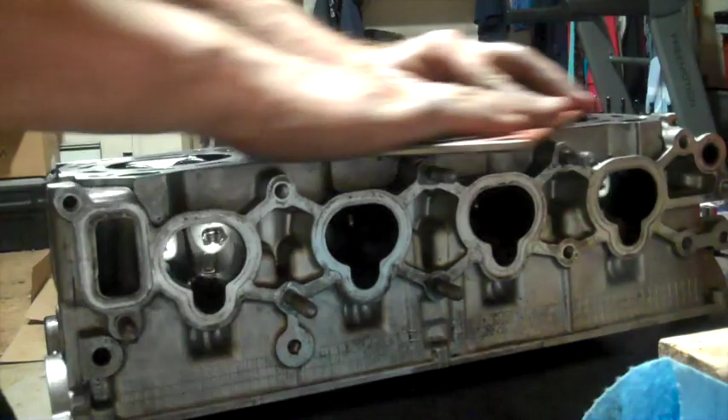Using a steel block and some 220 sandpaper, I'm checking before doing more cleaning work to make sure I have a flat surface here, using my .002 gauge. Yeah, right in here there's a little bit of a low spot, not very much though. I'll do a little more sanding on it, but I think it's pretty good. Got a pretty nice flat surface.

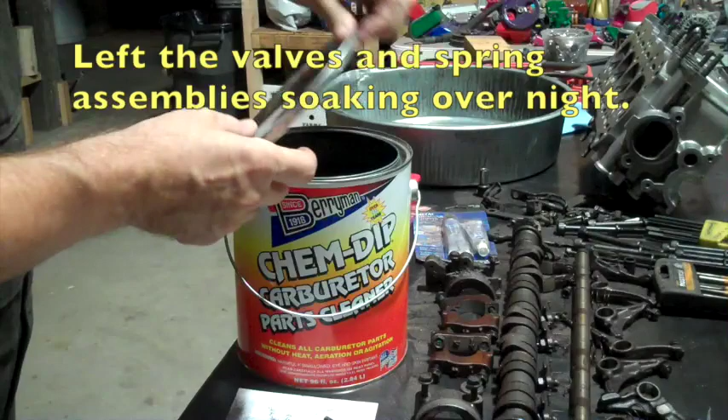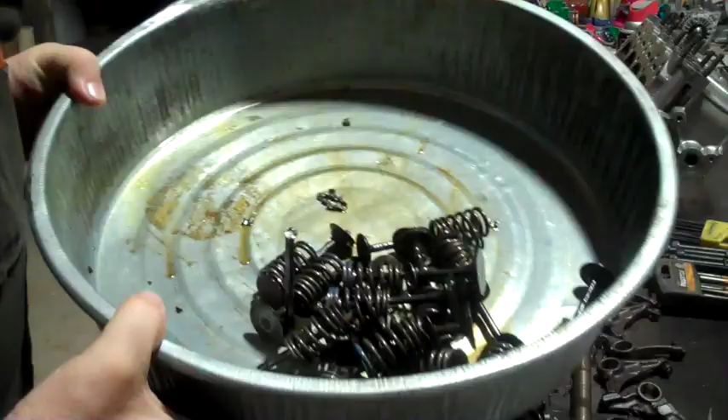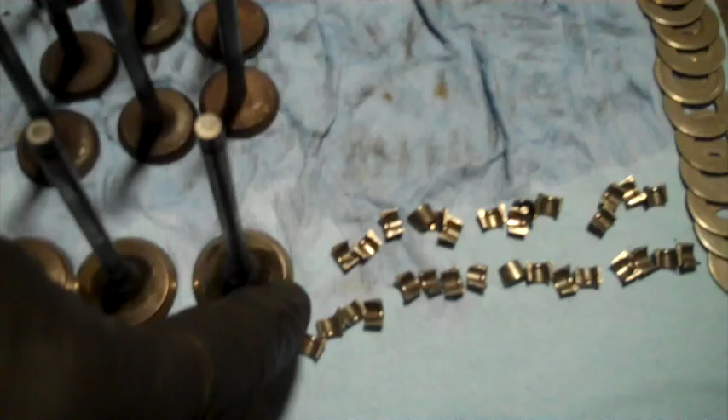Okay, I bought this Chem-Dip to clean off some of the parts. Let's see how that works. Looks like it worked pretty good actually. Everything looks pretty good and clean, especially did a really good job cleaning the springs and the washers and stuff. The valves are not so great though, I'm gonna have to work on them some more. I've got especially these exhaust valves, and I'm missing 2 keepers, probably in the bottom of that can.

Uh-oh. Okay, I've been cleaning on this thing for too many hours to count. I just polished off my head surface with 1200 grit sandpaper. It looks good, I checked it.

Got it all cleaned up pretty good, used my little wire brush. The worst was trying to clean out these little exhaust ports, they were really hard to clean out. I started cleaning up my valves, and they're pretty corroded. I don't like the way they look, so I just went ahead and ordered a new set of valves, and when they get in, I'll seat those new valves.

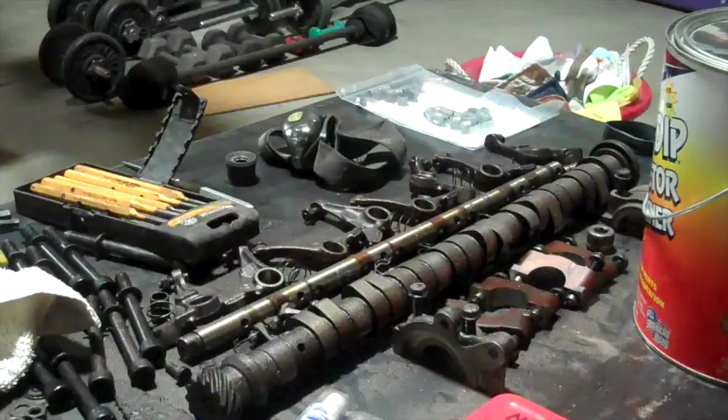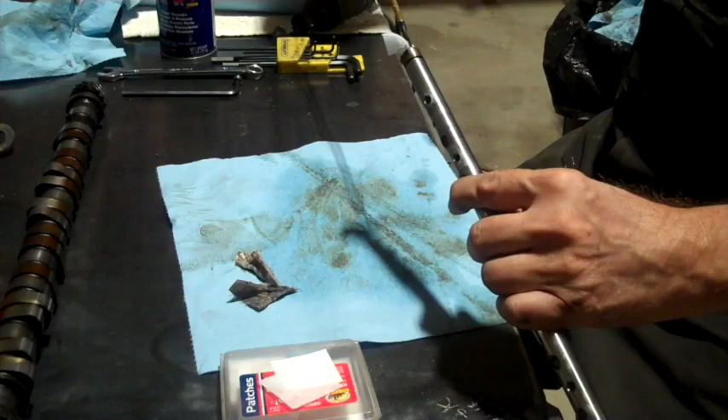In the meantime, I have a lot of other parts, little things that need to be cleaned up. This rocker arm shaft has a little plug in the end. It comes out with a number 5 hex wrench. You have to hold on to the edge here at the same time with a number 13. I figured out that my 22 caliber rifle cleaning kit works really good to clean this out.

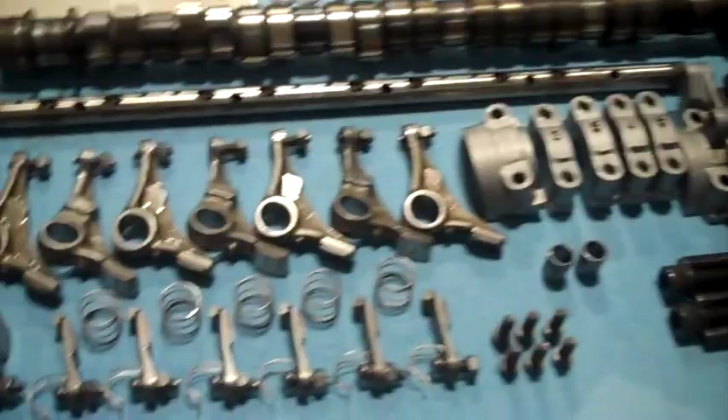So I thought I'd share that and it might give you an idea. Alright, that's all cleaned up. All the inside parts are all cleaned up and organized. The little parts weren't that bad. I numbered all of my rocker arms with my etching tool and left them in that Chem-Dip overnight, and then the next day they were pretty easy to clean up.

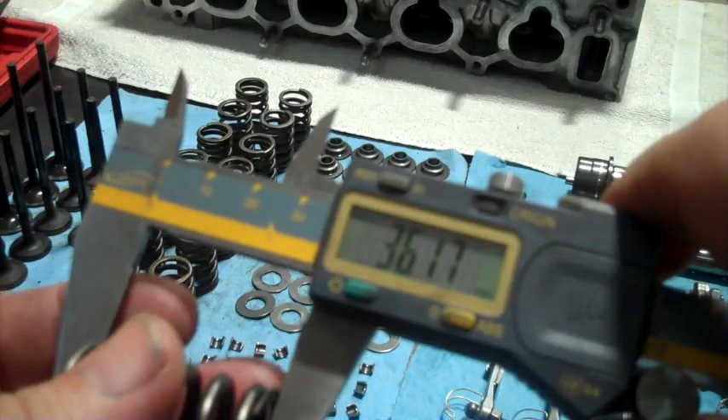Alright, we need to inspect a few things, and just looking at stuff, it all looks pretty good. I want to measure these springs, just using my calipers here. It looks like about 36.1, 36.4, 36.7, 36.4. So pretty much all around 36 point something.

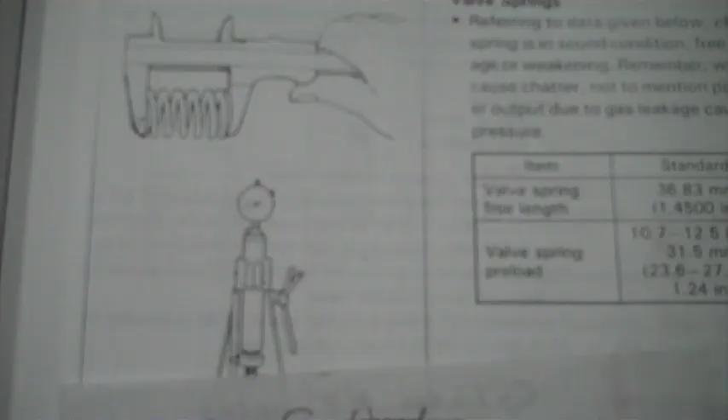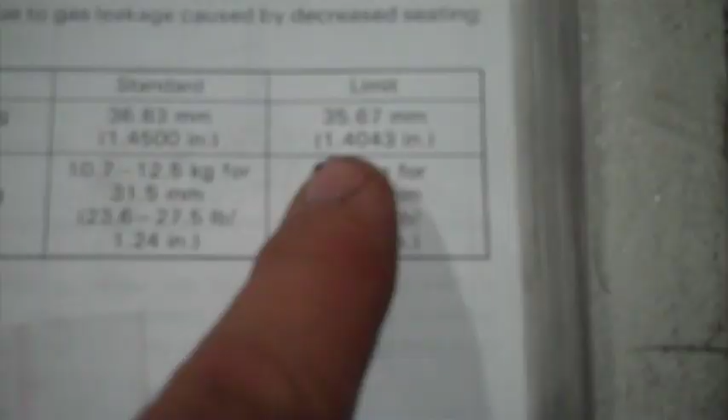In the book it says that should be 36.83 and no less than 35.67. So I checked all of the valves, all the valve springs, and they're all the same, between 36.4 and 36.8. So they're good.

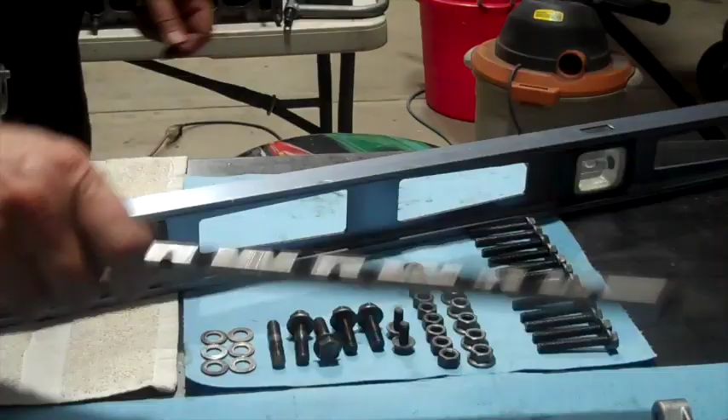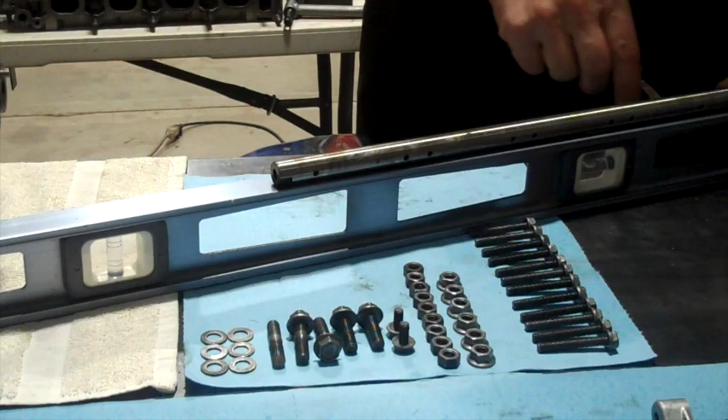I want to make sure my rocker arm shaft is nice and straight, so I'm going to lay it on this level I have here, that's probably the straightest thing I have. And I'm just using my .002 inch feeler gauge to check under, making sure there's no gaps. It feels perfectly straight to me. Yeah, it's good, it's straight.

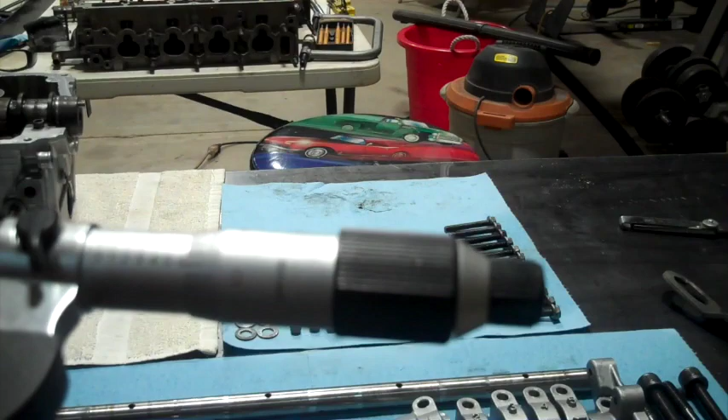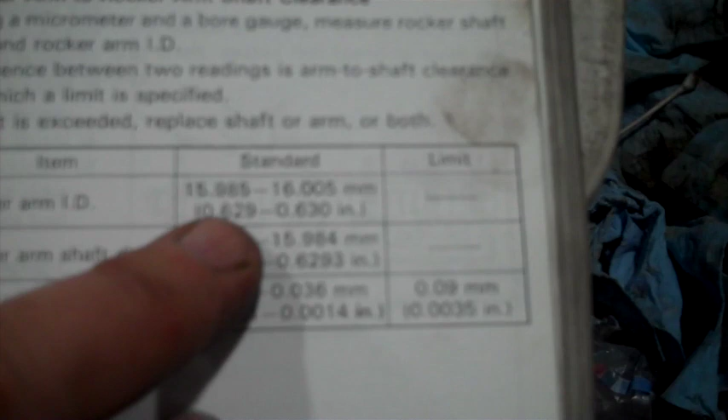I measured the diameter of my rocker arm shaft at a few places, and it comes out to be 0.6288, 0.6289, it's like in that area. It's supposed to be 0.629, so I'm just a little bit under the standard size there, but it's a tiny, tiny bit.

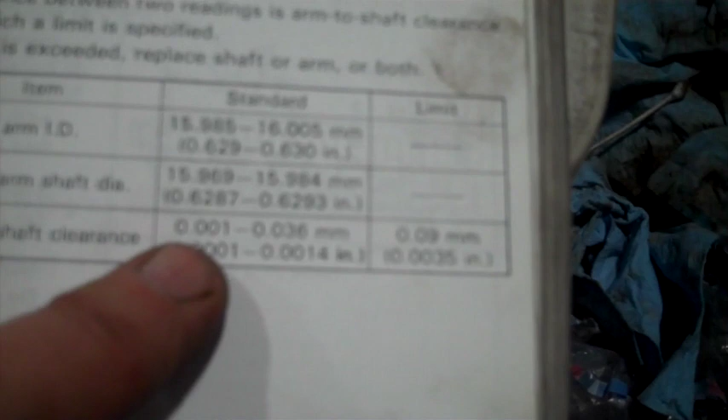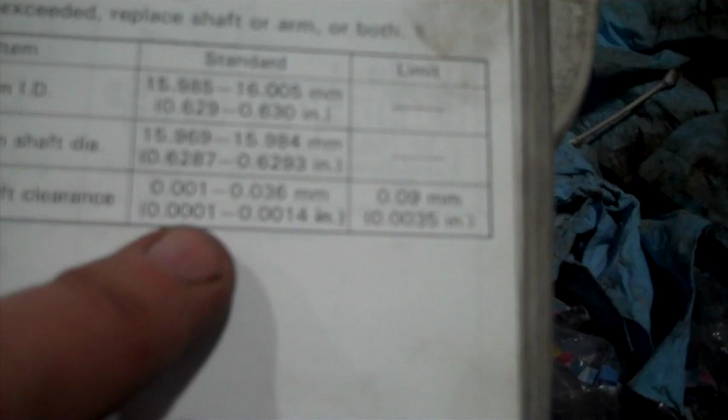The clearance is 0.001, or actually if I do it in inches, 0.0001 to 0.0014. So I have a little bit of slack in there. I don't have a measuring tool small enough to measure the insides of these things, but they seem to fit pretty good.

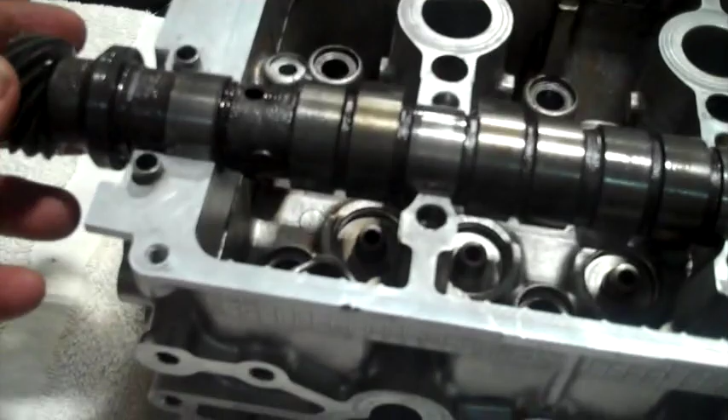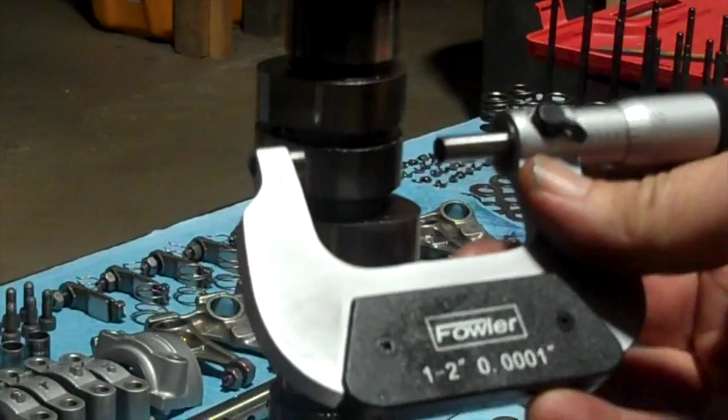Also my camshaft, I set it in here just to try and check and see if it seems really straight. I had a really tough time getting consistent measurements on these lobes, so the way I did it to try to get them consistent is I would slide this back and forth and get the widest possible spot.

And tighten it up a little bit, and I turn it a little bit - now it won't go. You loosen it. Pick that spot right about there, that's about the widest spot right there. Take that and then read my numbers off of that.

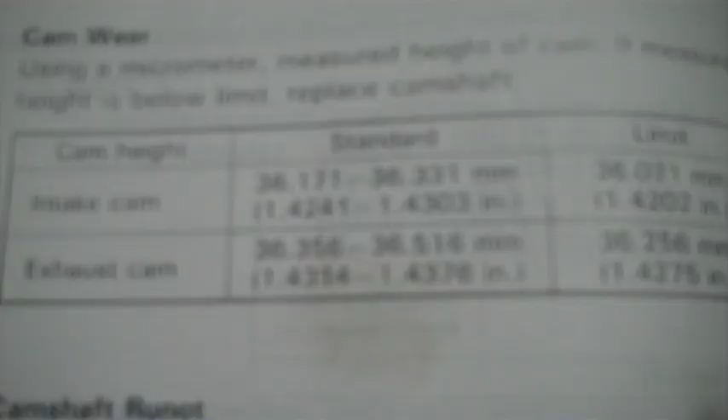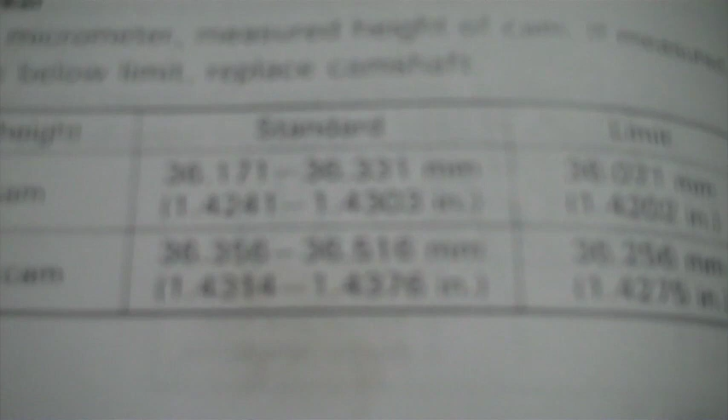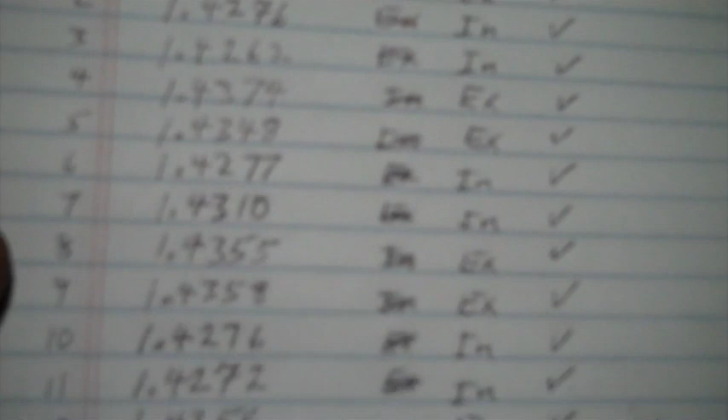Slow process. Okay, so in inches, the intake lobes need to be between 1.4241 and 1.4303. The exhaust between 1.4314 and 1.4376. I got all mine down here, I just went through and checked them all, and they're all good right in between the range that they're supposed to be in. So I'm good there.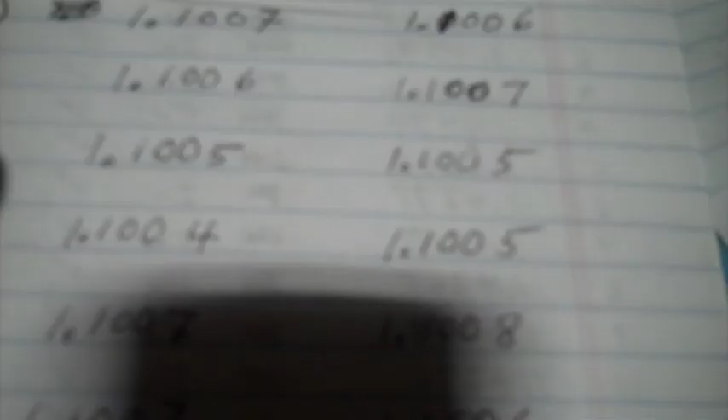I just measured each one of the camshaft journals, once this way and then 90 degrees to that, to check them for roundness. They all came out really close to round, like within 0.0001 inches, and all the sizes are good, they're all hardly worn at all, they're all in real good shape. So I'm good to go with my camshaft. I think the only thing I can't really check is straightness, but eyeballing it, it looks really straight, so I'm happy with it.